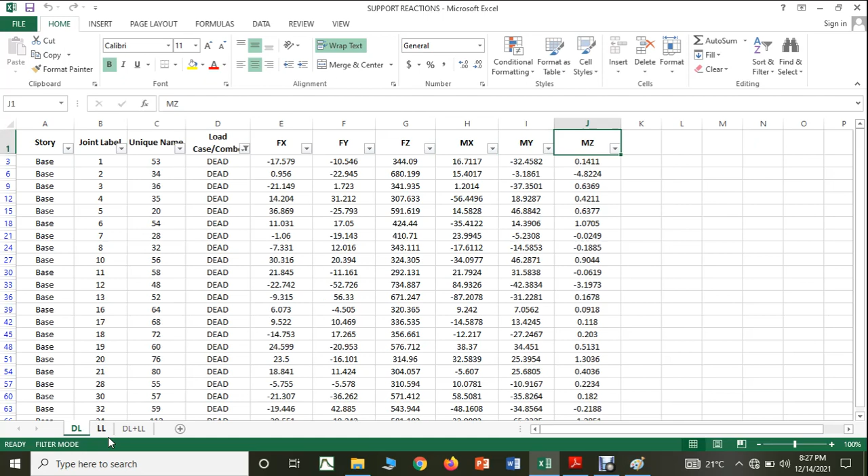This moment at the base of the column is also obtained from the software. That is nothing but your mx, my, mz, whether it may be dead load or live load, or your dead load plus live load - your mx, my, mz are your moment at the base of the column.

Now which one I have to take for my design, that we will see in the next video, while explaining that with the help of your Excel sheet, I will tell you which one has to be considered for the design. But your moment at the base is those values which will be obtained from the software, which will be in kilonewton meter. That is moment at the base of the column.

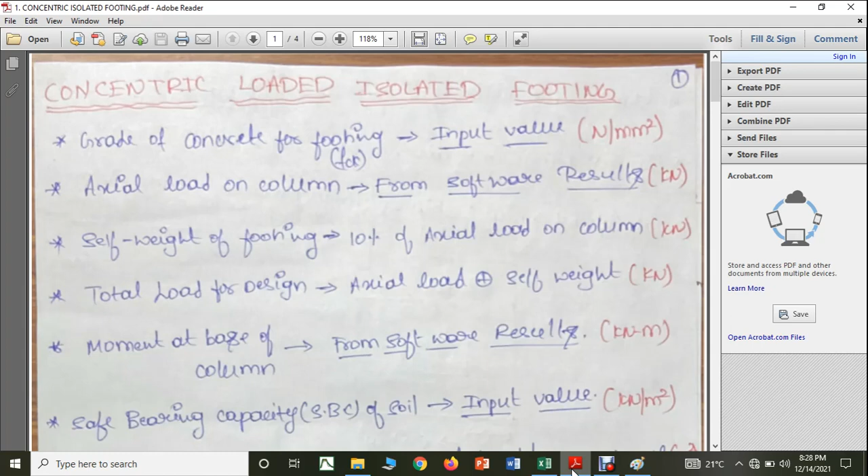Then next you should know is the safe bearing capacity, that is SBC of the soil. Your next step is finding out the safe bearing capacity of the soil.

The safe bearing capacity of the soil is also an input value. You will nowhere get it from the software or from any calculation. By doing the plate load test at the site, you will get the safe bearing capacity of the soil, or by carrying out some other investigations on the soil at the site, you will get the safe bearing capacity of the soil, which we have to use for our design.

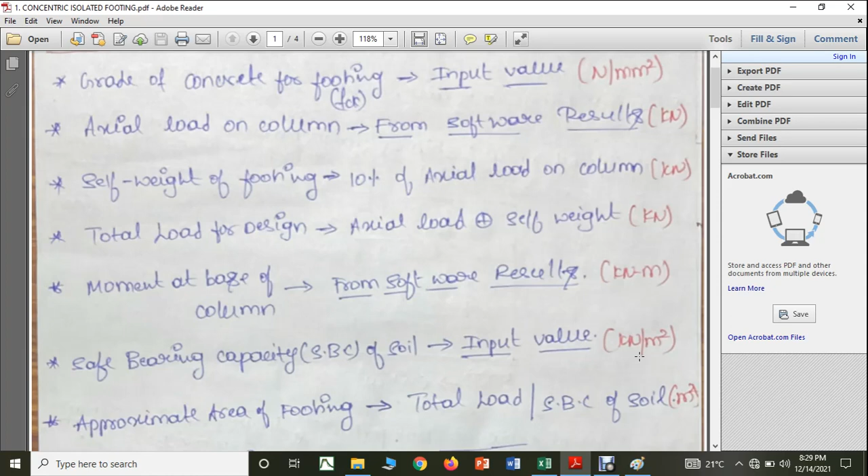And that is an input value which will be given in kilonewton per meter square. So once you know the safe bearing capacity of the soil and once you know the total load for the design, you are supposed to calculate the approximate area of the footing.

So how do you calculate the approximate area of the footing? It is nothing but your total load divided by the safe bearing capacity of the soil. So when I do that, I will get the area of the footing in meter square.

I will get the area of the footing in meter square. So that will give you the approximate area of the footing.

Now usually, since all the columns considered in this problem are rectangular in nature, the footing will also be rectangular in nature. How we usually place the columns is that the longer dimension of the column will be parallel to the longer dimension of the footing, and the shorter dimension of the column will be parallel to the shorter dimension of the footing.

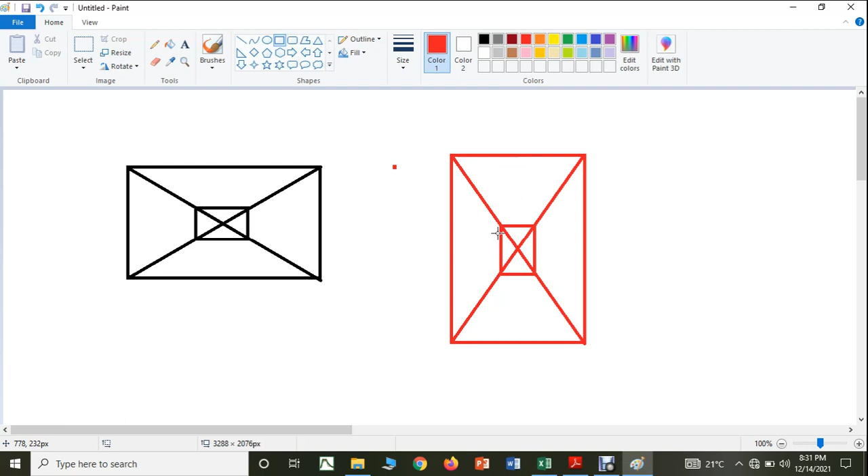The longer dimension of the column is parallel to the longer dimension of the footing. We always try to maintain that because it makes the footing more stable and makes the calculations easier. So based on that, we have to do rectangular footing only, because all my columns are rectangular, therefore I need rectangular footing.

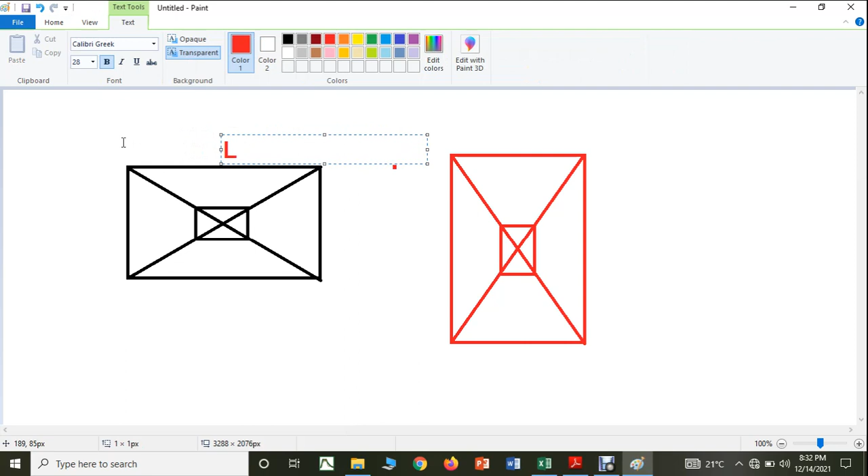Now whenever we do the rectangular footing, we usually take this as my length. Okay, this is my length, and this we usually take as breadth.

This is length, this is breadth, and we always try to maintain the ratio of length by breadth as 1.5, because that makes my footing more stable and more safer. So that's the reason I always maintain my length to breadth ratio as 1.5.

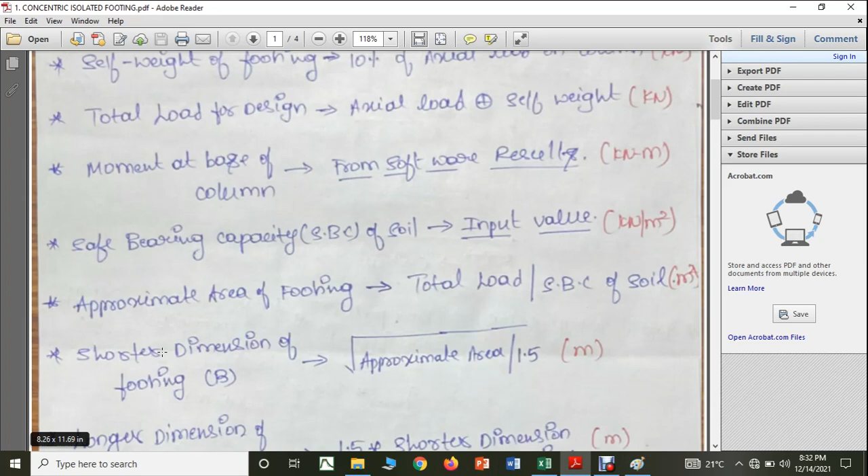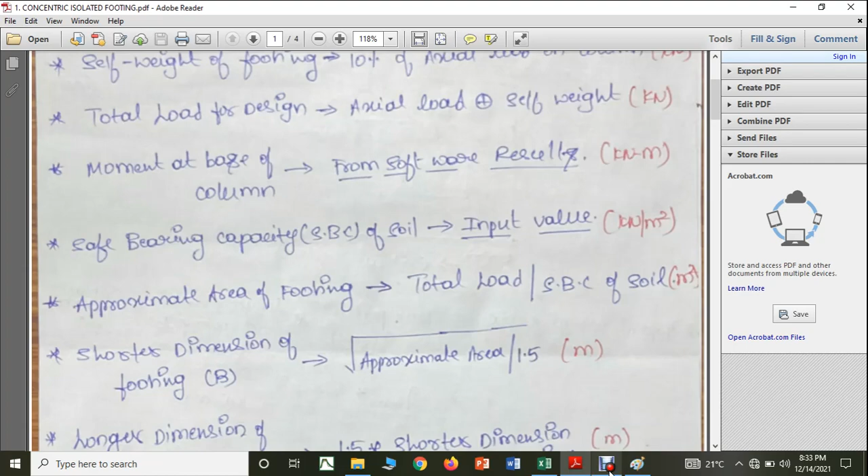So based on that, first we will find out the shorter dimension of the footing, represented by capital B. That will be the square root of the approximate area of the footing divided by 1.5. This gives the shorter dimension of the footing, B, in meters.

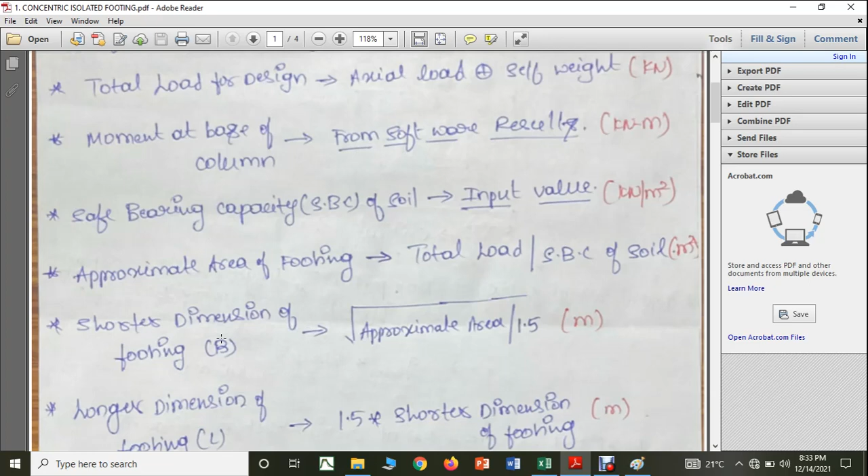Once I get the shorter dimension, since longer dimension by shorter dimension is maintained as 1.5, the longer dimension L is the shorter dimension multiplied by 1.5, again in meters. So now we have the longer dimension of the footing, capital L, and the shorter dimension, capital B.

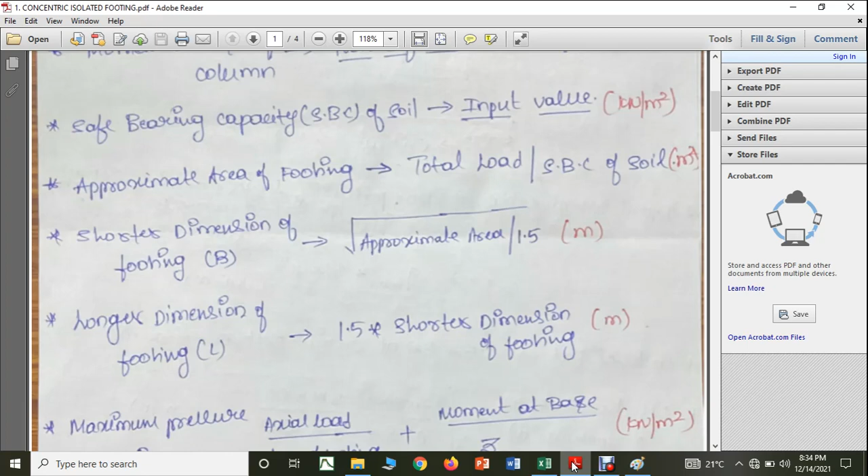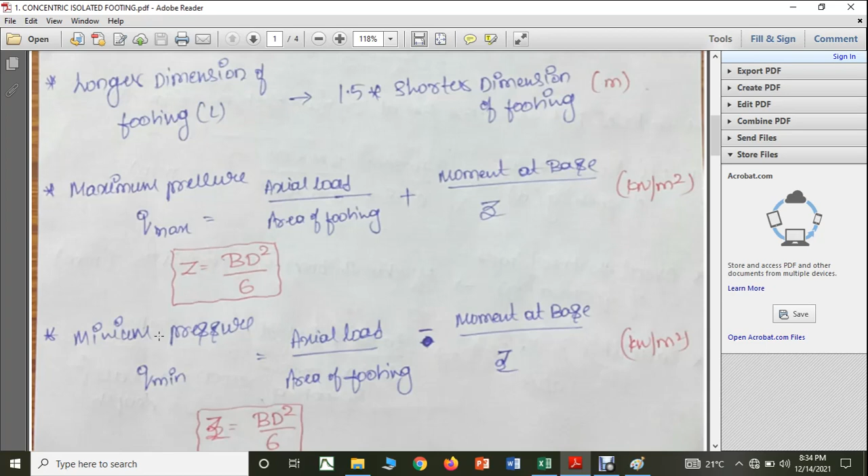So once your dimensions are done, the next step is finding out the maximum pressure and minimum pressure below the footing. Your maximum pressure is represented by Q max and your minimum pressure is represented by Q minimum.

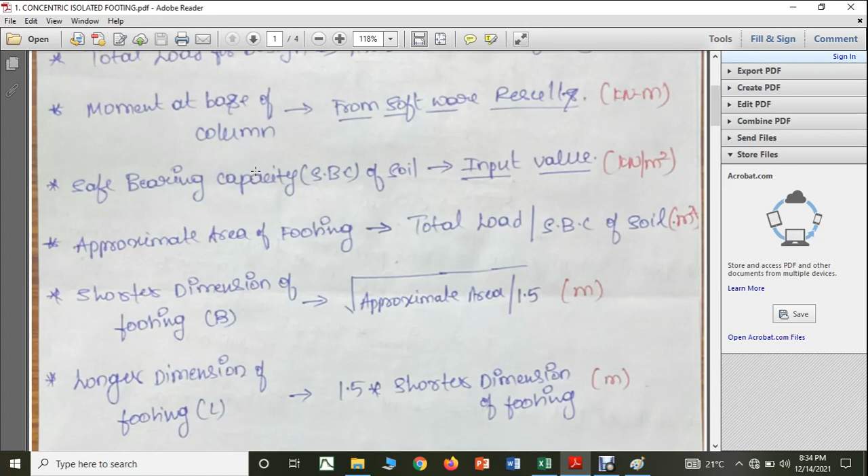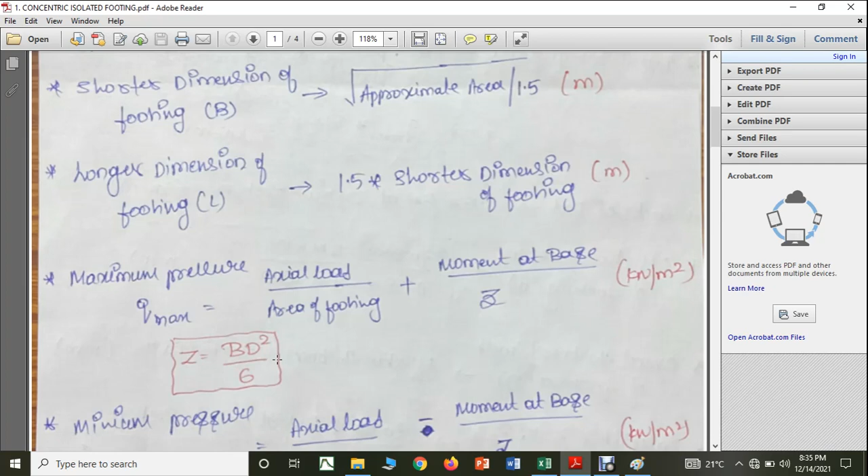This is equal to your axial load - here you are not supposed to take the total load, only the axial load - divided by area of the footing, that is length into breadth, plus moment at the base, which you get from the software, divided by Z. Z is given by B D square by 6.

So B is nothing but the shorter dimension of the footing, and D you can make as L, the longer dimension of the footing. So Z is B into L square by 6. That will give you the maximum pressure in kilonewton per meter square.

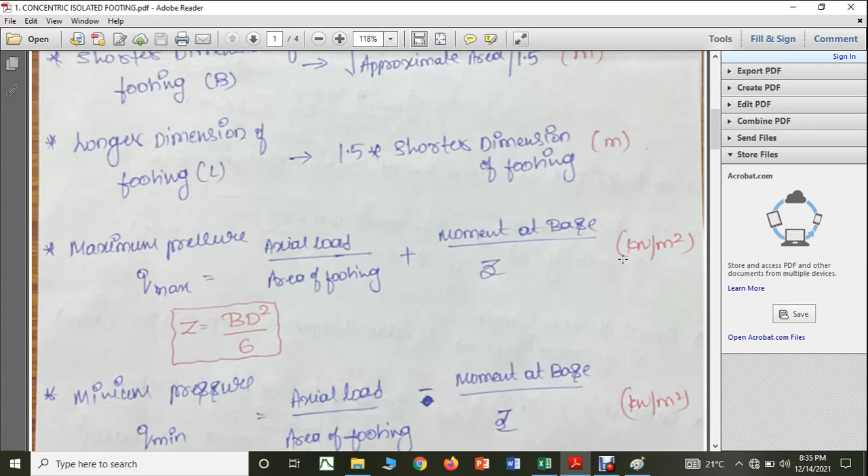Then minimum pressure is the same formula, axial load by the area of the footing, but instead of plus you will have minus moment at the base divided by Z, where Z is again B L square by 6, giving you kilonewton per meter square.

This means what you have calculated is the pressure distribution below the footing. You have calculated the pressure distribution below the footing like this - this is what you calculated, the pressure distribution below the footing.

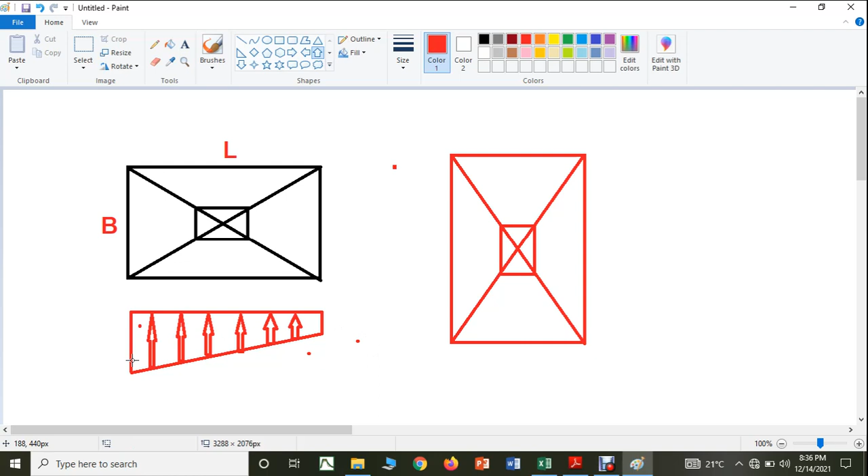This is what you find out, the pressure distribution below the footing. This will be your Q max, this will be your Q minimum. When I make it plus, I will get the maximum pressure. When I make it minus, I will get the minimum pressure. That is Q max and Q minimum.

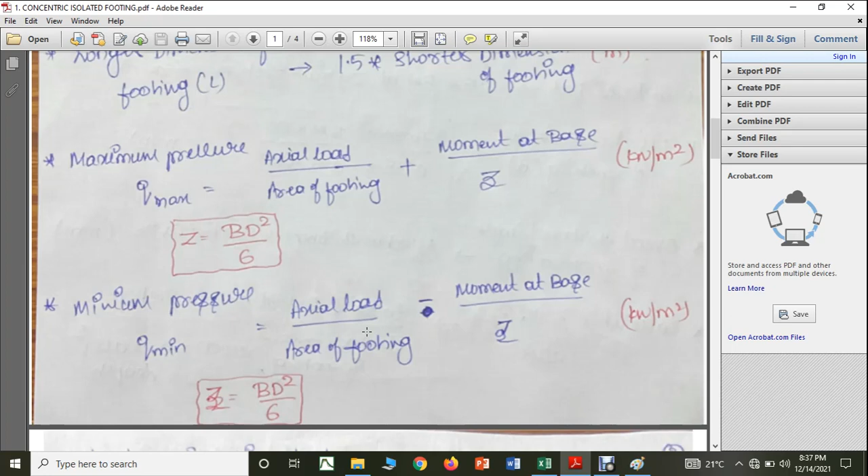So once the maximum pressure and minimum pressure is done, you are supposed to write the shorter dimension of the column. The shorter dimension of the column is represented by small b, whereas the shorter dimension of the footing is represented by capital B. The shorter dimension of the column is an input value, which we considered in our modeling of the problem in ETABS, and that will be in meters.

The longer dimension of the column will be represented as small l, whereas the longer dimension of the footing will be represented as capital L. That is also an input value, given in meters.

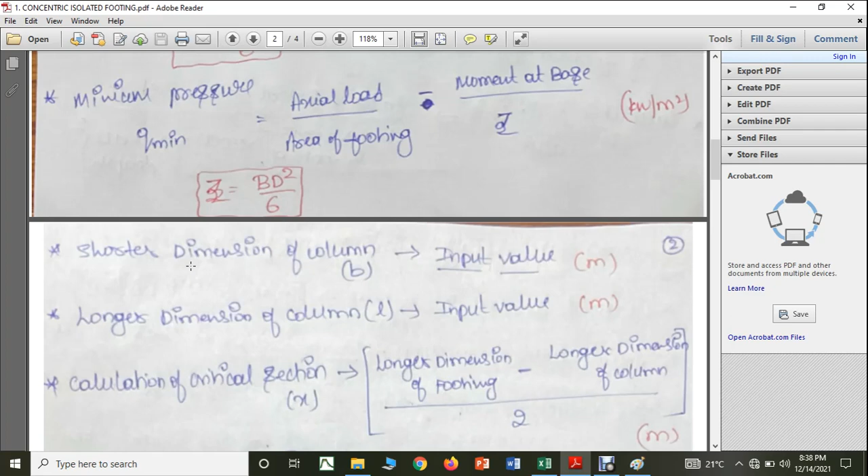Once this is done, you are supposed to find out the critical section. Why do you want to find the critical section? Because you are supposed to calculate the moment at the critical section.

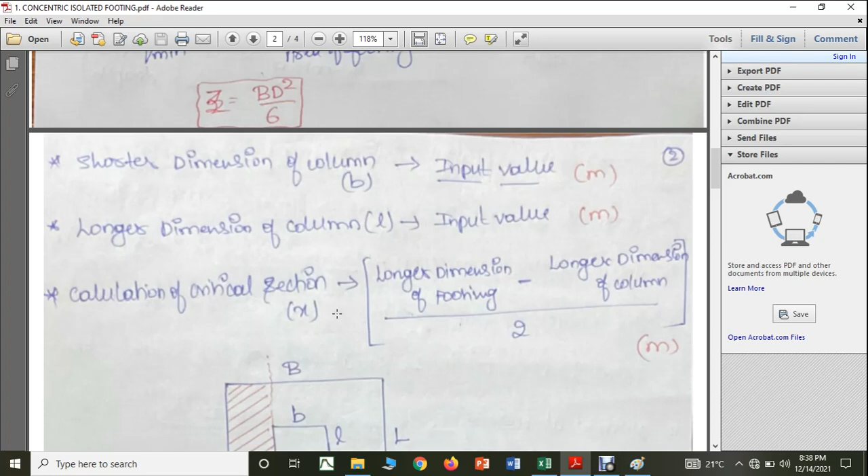When you have an isolated footing with concentric loading, the critical section for the footing will always lie at the face of the column. This is your critical section for the footing, that is, a concentric isolated footing. Your critical section always lies at the face of the column.

So now I have to find out this distance. How do I find it? That will be taken as small x. It is your longer dimension of the footing, which you can vary from B to L or L to B. So therefore, in words: longer dimension of the footing minus longer dimension of the column, divided by 2, that gives this distance.

If I am taking this as L, then it is capital L minus small l divided by 2. If I am taking this as B, then capital B minus small b divided by 2. Therefore, longer dimension of the footing minus longer dimension of the column, divided by 2, will give you the critical section x in meters.

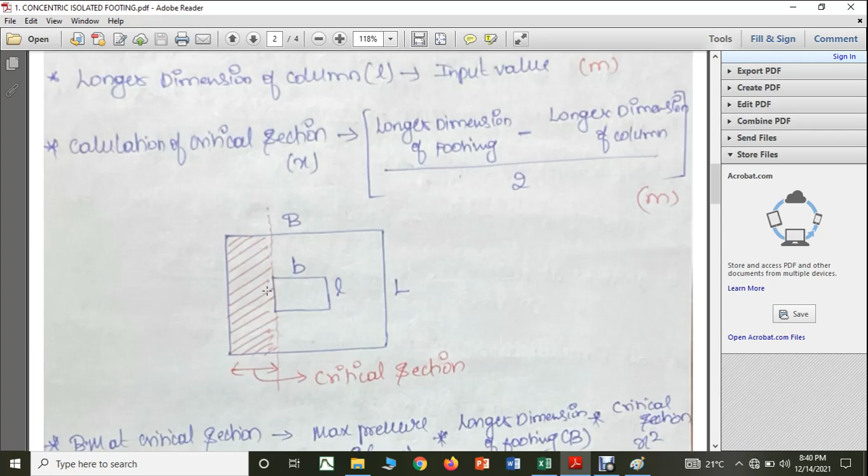Once you calculate the critical section, you are supposed to find out what is the moment at that critical section x. So the next step is, we have calculated the bending moment at the critical section. So how did we calculate the bending moment at the critical section?

The bending moment at the critical section is equal to the maximum pressure, that is Q max, multiplied by the longer dimension of the footing, that is length or breadth, multiplied by the critical section x, into again critical section x, divided by 2. This critical section x into critical section x will give you the bending moment at the critical section.

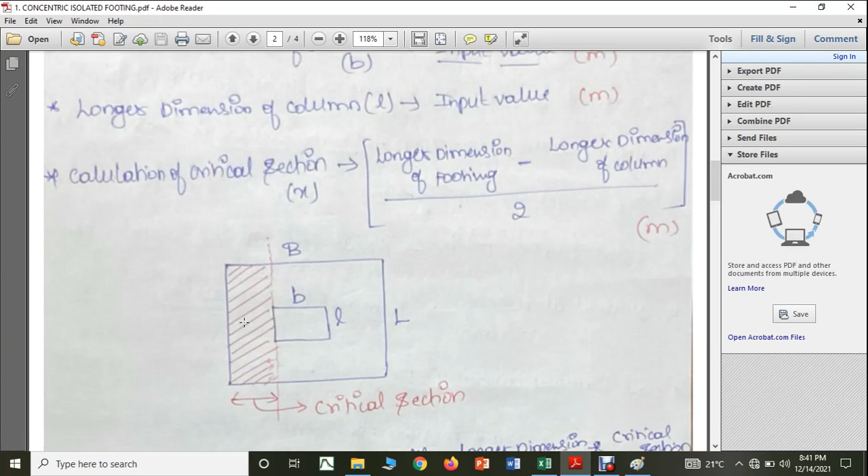Again, let me explain: the bending moment at critical section is the maximum pressure Q max multiplied by the longer dimension of the footing, whether it is breadth or length, that is capital L or capital B, multiplied by the critical section squared divided by 2. It is nothing but this portion, whatever I highlighted here, which acts as your cantilever projection. Whenever you have a cantilever projection with UDL, how do you calculate it? For example, this is my cantilever beam.

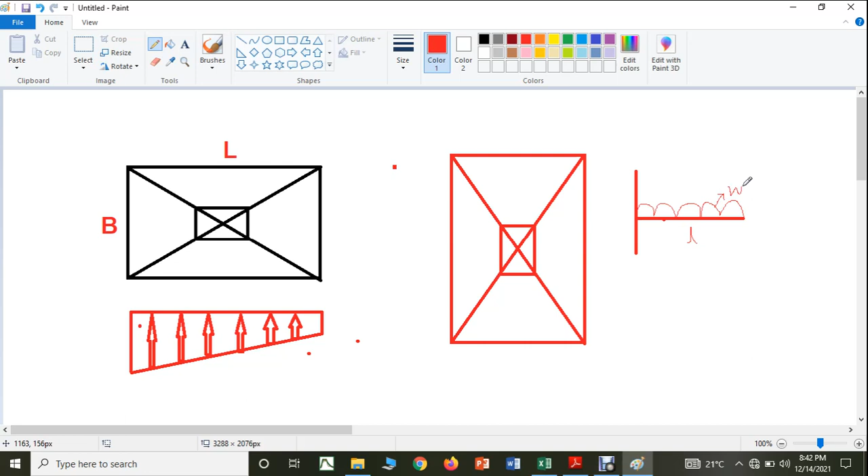Okay, this is my cantilever beam, and assume that on this you have a UDL acting like this. So when I want to find out the maximum bending moment, let us know, this is the length, and this is your value W. So it will be W into L acting at a distance of L by 2.

So it is W into L acting at a distance of L by 2, because when I made W into L, it becomes a point load acting exactly at the center, into L by 2. That is nothing but your maximum bending moment at this support.

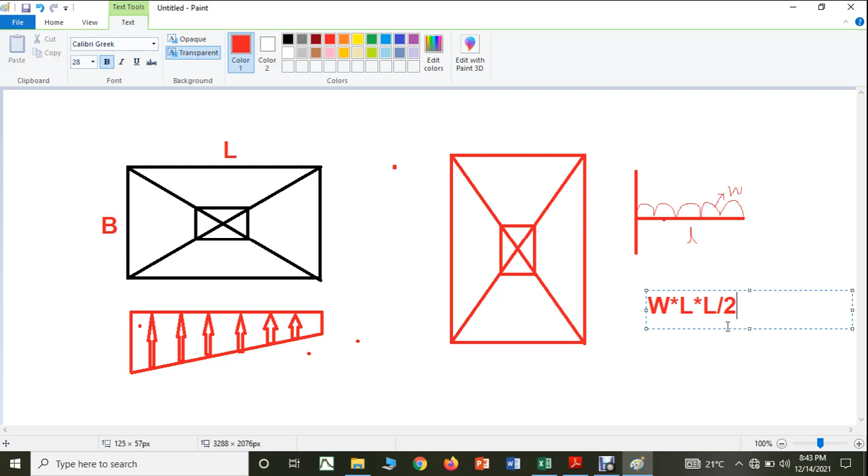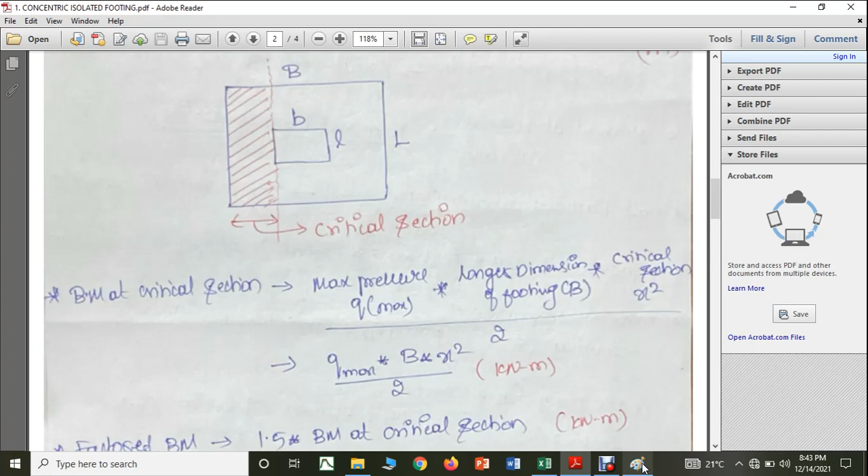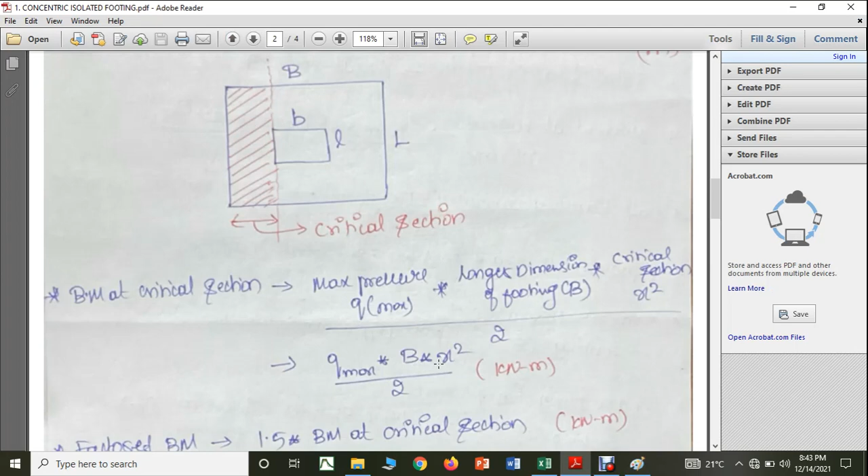In the same manner, we are calculating the maximum bending moment at this critical section, that is Q max, that is pressure from the bottom, into my total length of the footing, that is my dimension of the footing, that is B. So when I make that, it gets converted to kilonewton acting at a distance of x into x by 2, same as finding the maximum bending moment at the support. This is the same as what we calculated, that is Q max into B into x square by 2, which gives you the maximum bending moment in kilonewton meter.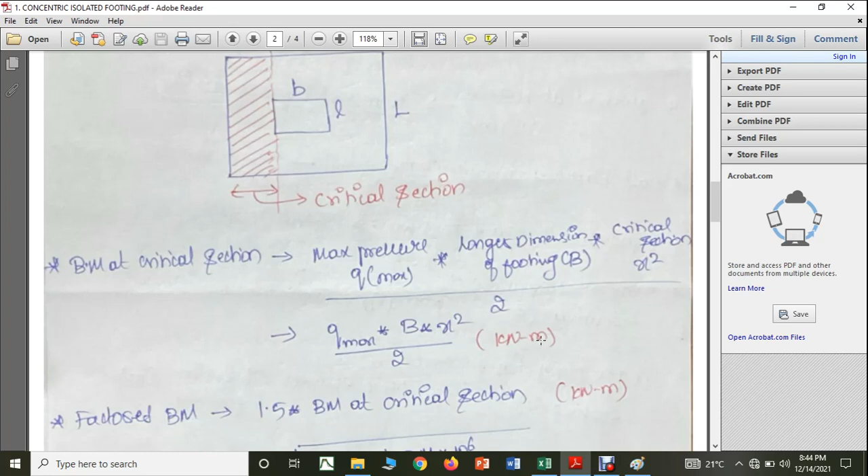Once that is done, you are supposed to find out the factored bending moment. My factored bending moment will be 1.5 into my bending moment at the critical section, which gives you the factored bending moment in kilonewton meter.

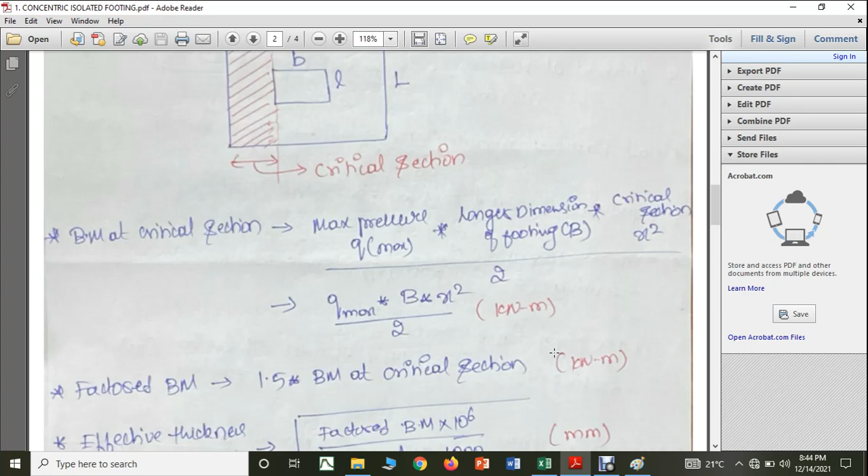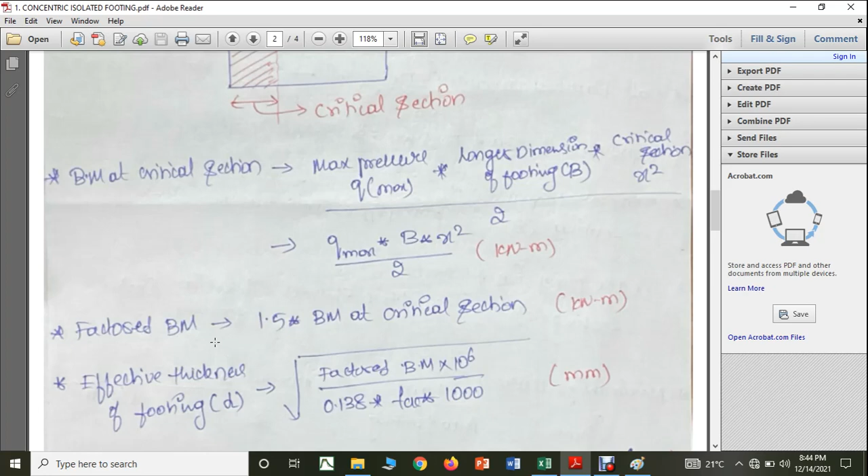Once you know the factored bending moment, as you already know we have found the longer dimension and shorter dimension of the footing, the next step is to calculate the overall depth or thickness of the footing. With the help of this factored bending moment, we calculate the effective thickness of the footing, represented as small d, which is equal to the square root of factored bending moment into 10 power 6.

When I multiply this factored bending moment into 10 power 6, it comes in kilonewton meter converted to Newton mm, divided by 0.138 into FCK into B. That will give you your effective thickness of the footing, small d, in mm.

You may wonder how I got this. In the design of beams, based on the grade of concrete, we have bending moment equal to 0.148 FCK BD square, 0.138 FCK BD square, or 0.133 FCK BD square. We use 0.148 FCK BD square for mild steel, that is 250 grade steel. We use 0.138 FCK BD square for Fe415 grade steel. And 0.133 FCK BD square is used for Fe500 steel.

Since I am using Fe415 grade steel here, I use bending moment equal to 0.138 FCK BD square. When you simplify that, it becomes bending moment into 10 power 6 divided by 0.138 into FCK into 1000, under square root, which gives you the D value in mm.

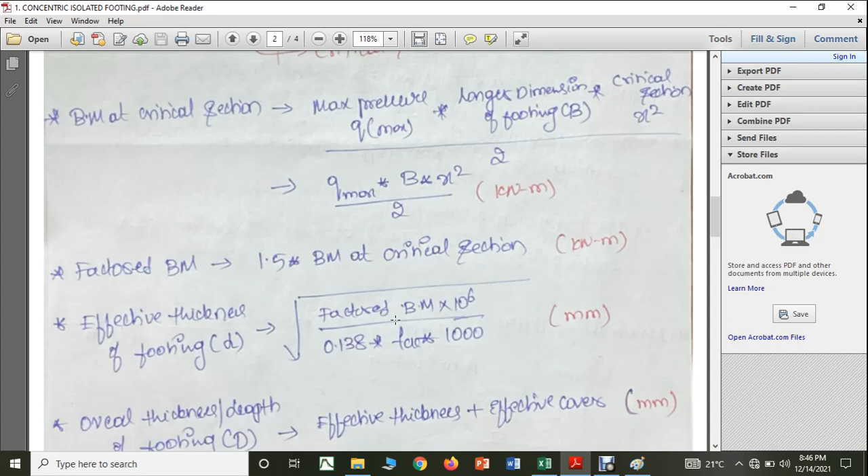Now for that effective thickness, you are supposed to add the effective cover. When you add the effective cover to this, you get the overall thickness or overall depth of the footing, represented as capital D, which will also be in mm.

As per IS 456-2000, for the footing you are supposed to maintain an effective cover of 50 mm because it is exposed in direct contact with the soil. Therefore you have to give an overall effective cover of 50 mm. Just keep that in mind. So when you add the effective cover to the effective depth, you get the total depth, capital D, in mm.

Okay, you will get the capital D in mm. So once your capital D is found out, your next step is finding out the reinforcement details, because now you've got the longer dimension, the shorter dimension, and the depth of the footing. Next step is how much reinforcement has to be provided.

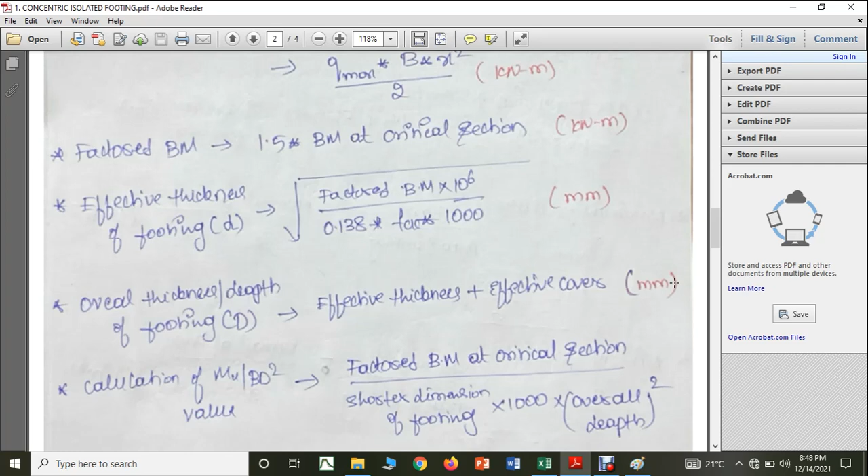Now, in order to find out your reinforcement, we will use one term called percentage of steel. With the help of percentage of steel, we can find out the area of the steel, and from the area of the steel we can find out the spacing of the steel.

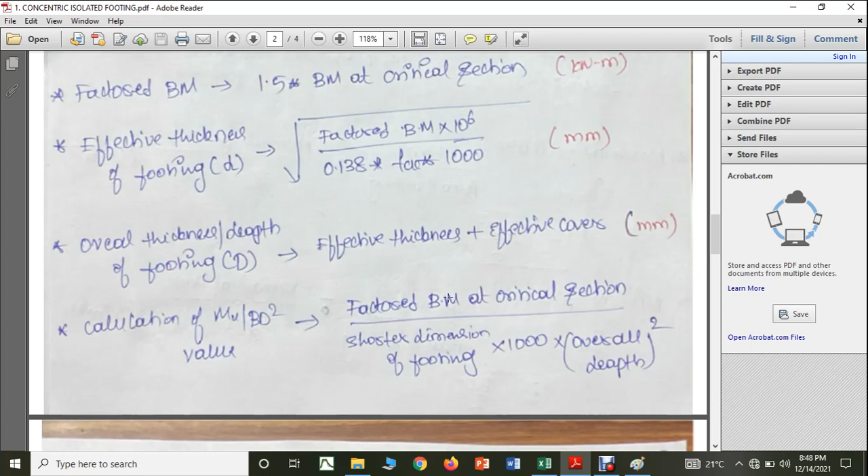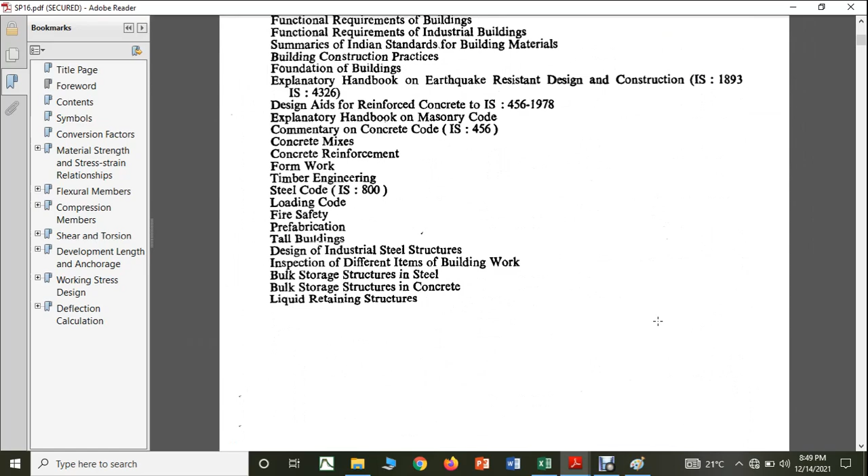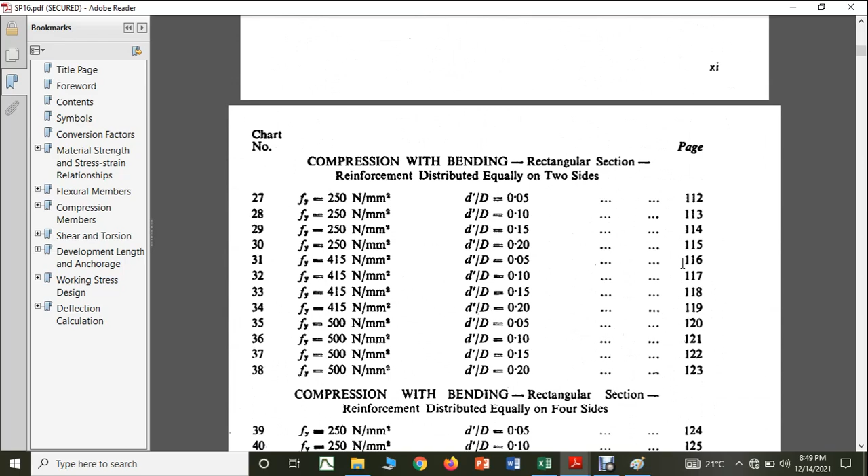Your percentage of steel will be found out from a chart, what we call the SP16 chart. I'll just show you how the SP16 is presented. SP16 is a design method for your reinforced concrete. Everything is given in the form of charts. This is an SP16. This will give you the values like this.

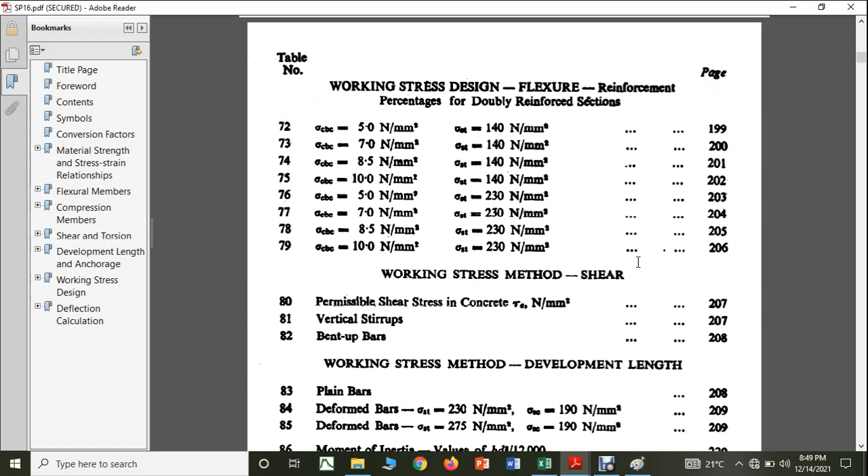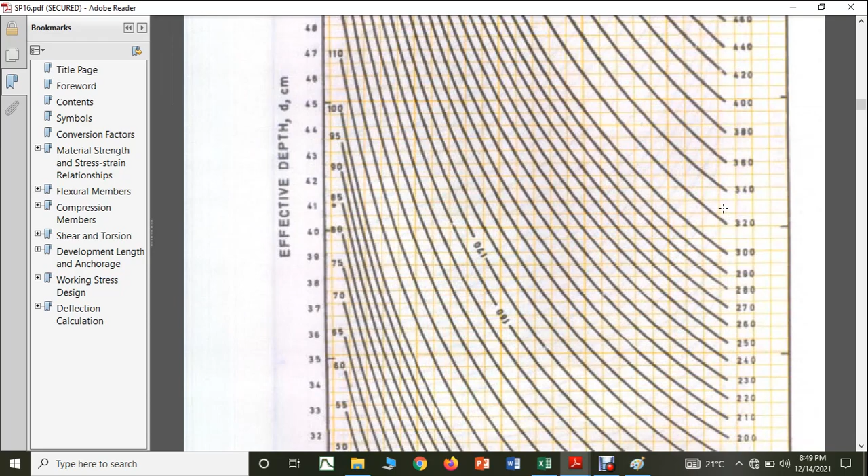Now, with the help of this SP16, we will find out your value of PT, that is percentage of steel. So these are your basic information. From here your tables are going to start. These are all charts. For the design of columns, for the design of footings, everywhere we will use this.

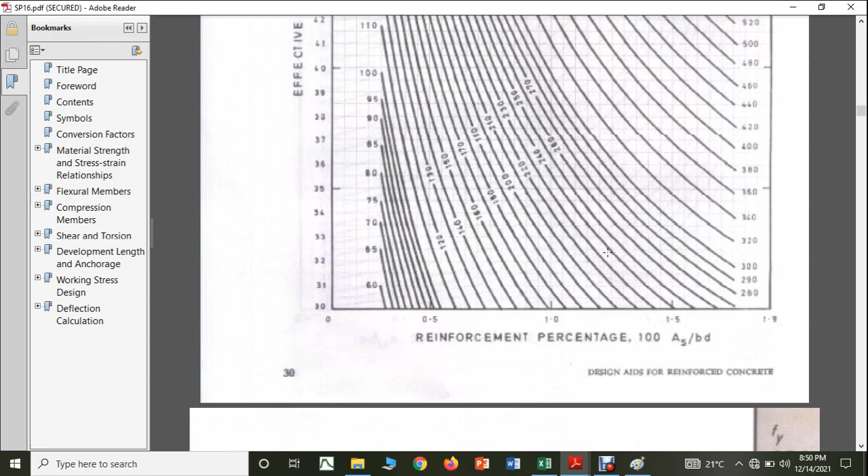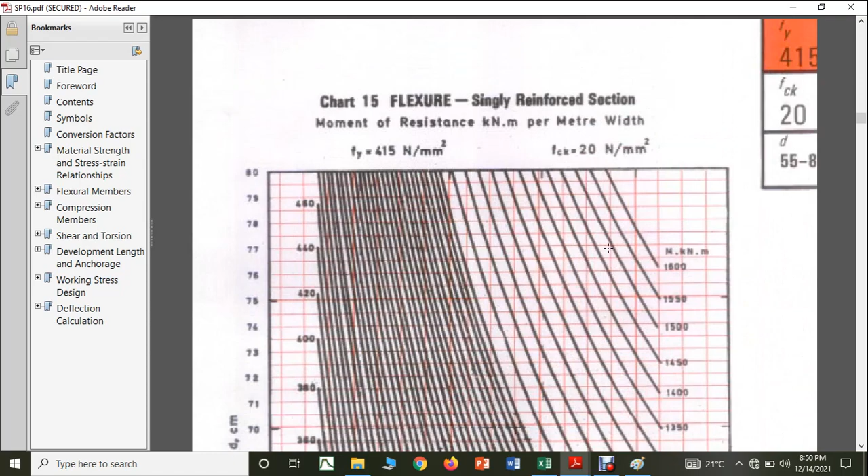Yes, so this is not required now. Now, when I want to find out the percentage of steel for the footing, I have to go to one chart which will give you the value in form of Mu by bd square. I'll just show you the graph. So these are the various graphs, not this one.

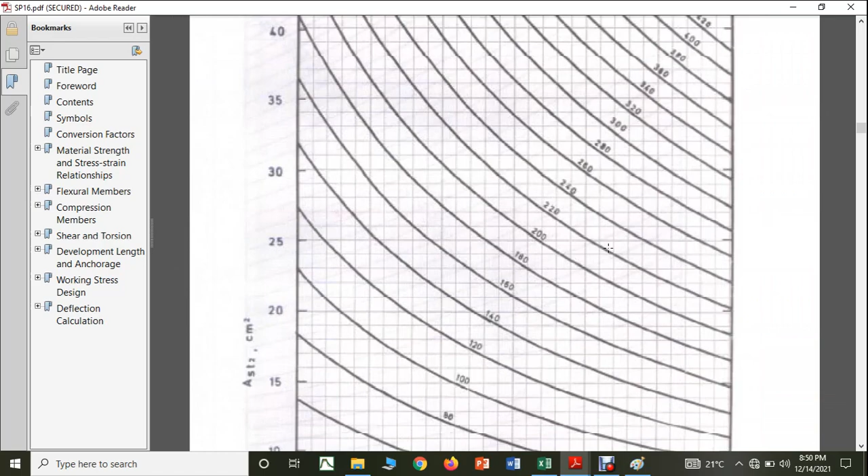So this graph we are supposed to use, that is table 1, flexure reinforcement percentage PT for singly reinforced section. Here you can see that based on your grade of concrete, and it will be there on the grade of steel. So your grade of steel will be 240, 250, 415, 480, 500. Now this table 1 is for your FCK 15.

As we have already discussed, for our problem we are choosing the grade of concrete for the footing and column as 25. Therefore I have to go to the table where FCK is 25, that is table number 3. Now my Fy is 415, that is HYSD bar.

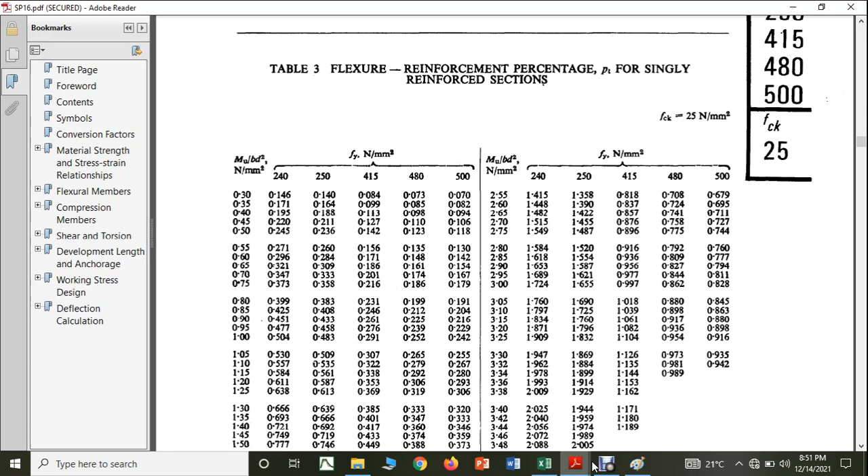Now these values will give you the PT values, but in order to find out, we need the value of Mu by bd square in Newton per mm square. Therefore we have to find out the value of Mu by bd square. So what is Mu? Mu is nothing but your factored bending moment at the critical section divided by your shorter dimension of the footing, that is B, into 1000. Why I did this 1000 is because in order to convert your dimension which is in meter to mm, and the effective depth squared, because d square, the effective depth in mm, should be squared.

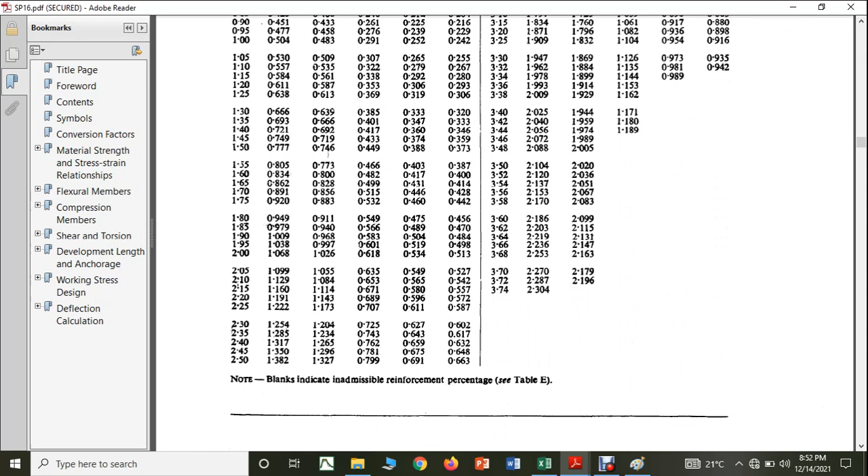So when you do that, you will get a certain value. That value you have to see here. These are the different values. So this value you can see here. If you are not getting the exact value what is there, then you can go for interpolation. How to do that, I'll explain when I take up one loading on the column. So now generally I am explaining.

Now let us assume that my Mu by bd square value I am getting is 0.60, and for this FCK 25 and Fy 415, for 0.60 my value is 0.171. It means my percentage of steel PT will be 0.171%.

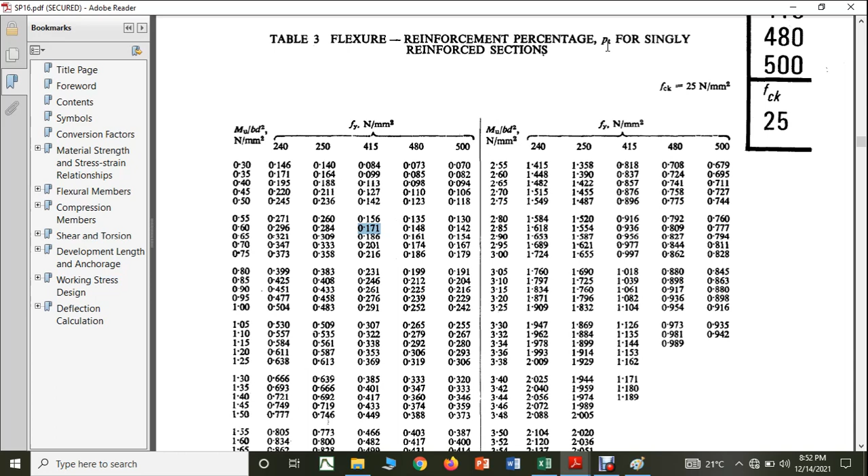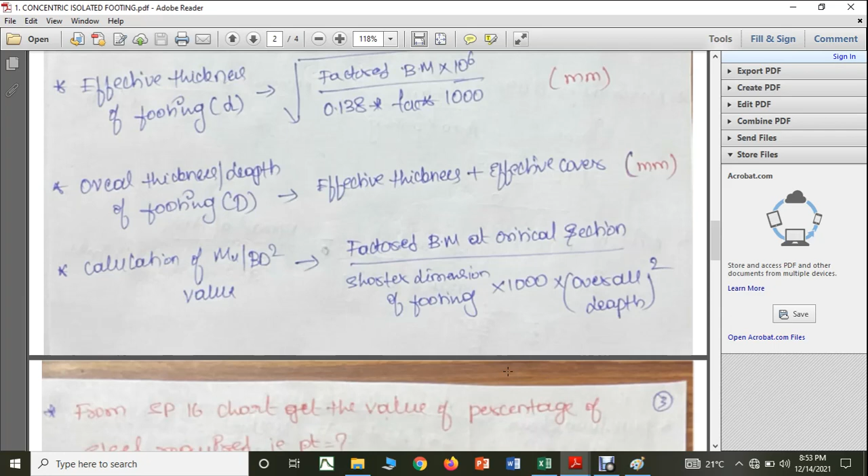But keep it in mind, student, as per IS 456 2000, for the footing, your percentage of steel should not go less than 0.12%. You can get from the SP16 chart the value of the percentage of steel required, that is PT. When you find that value, if it's more than 0.12%, no issues.

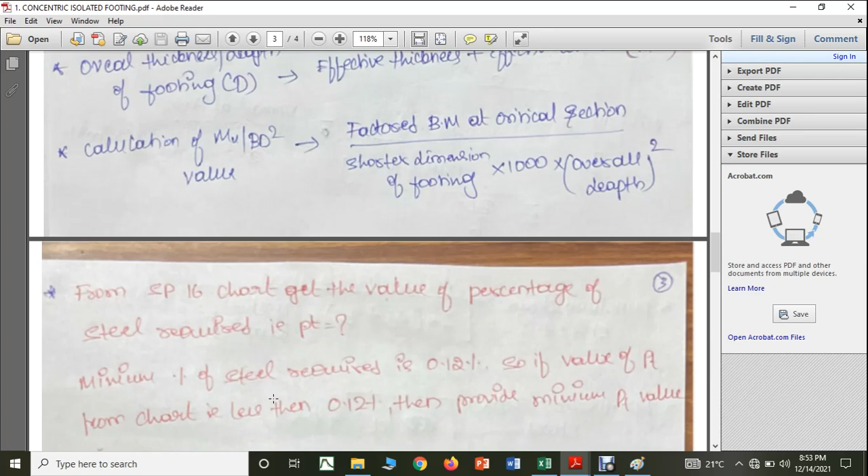But if you are getting the PT value less than 0.12%, then you are not supposed to use that PT value, because as per IS 456 2000, the minimum percentage of steel that you have to maintain for the footing is 0.12%. If you are getting less than 0.12%, then consider the minimum percentage of steel 0.12% for your design.

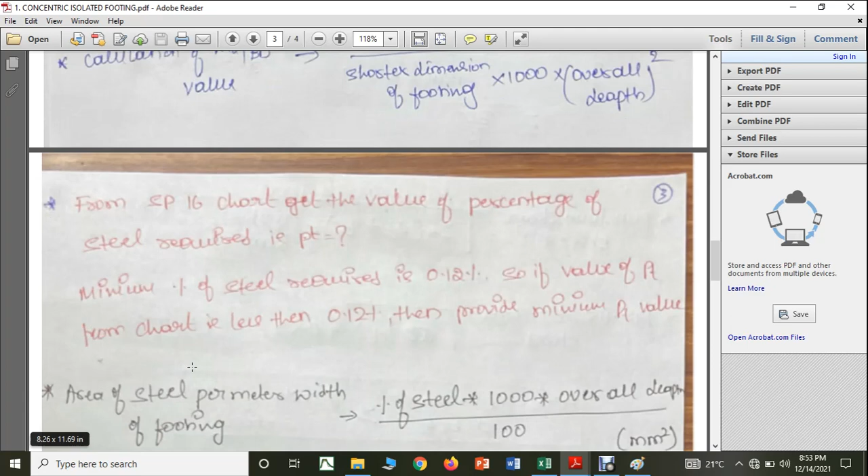Okay, so once you get the PT value, then how to find out the area of steel, we will see in the next lecture. Thank you, learners.